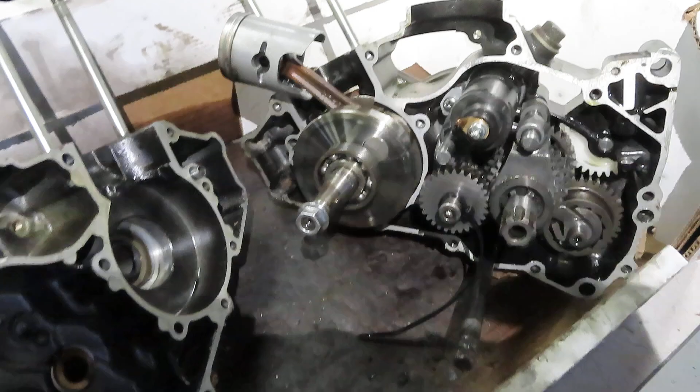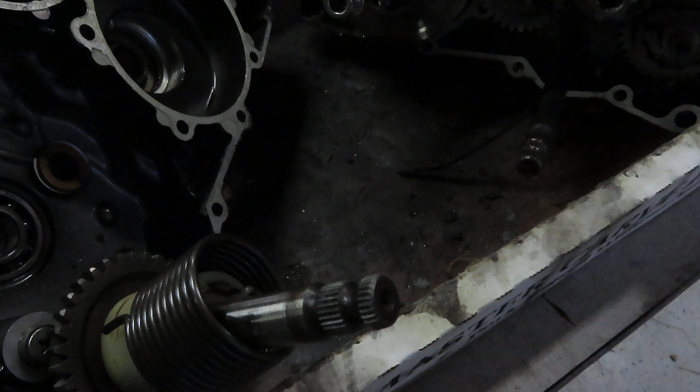I am working on my 1992 KE100, a kid's bike. The problem with this bike is it broke the shaft that holds the Kickstarter on it. That's this part right here. And in order to fix that, you have to split the case. You can't remove a side panel and get at those parts. The case has to be split.

So the reason I'm doing this video is to tell you that, plus just kind of show you all the parts involved here. Maybe it'll help you if you have to do this job.

So first thing I did, of course, was take the engine out of the bike. Pretty simple. I got it over here and I removed all the bolts from the case halves and was able to split the case. It's a little tricky. If you have a case puller like they show here in the manual, that would be nice. I don't have one, so I just kind of kept working it, and then I tapped on the crank nut here a little bit, and finally this thing came loose, and I got into it.

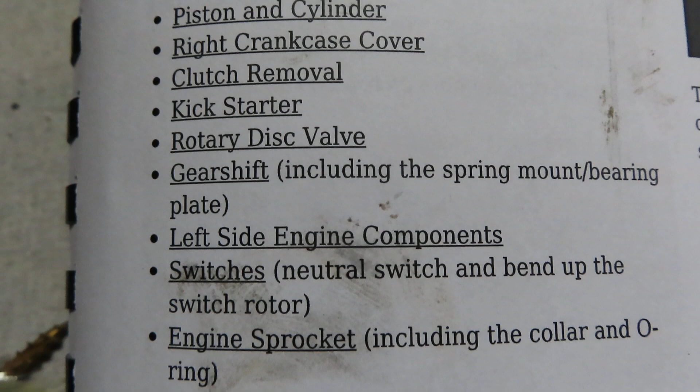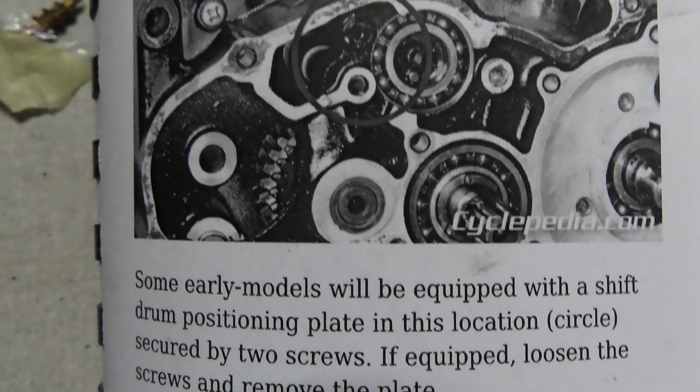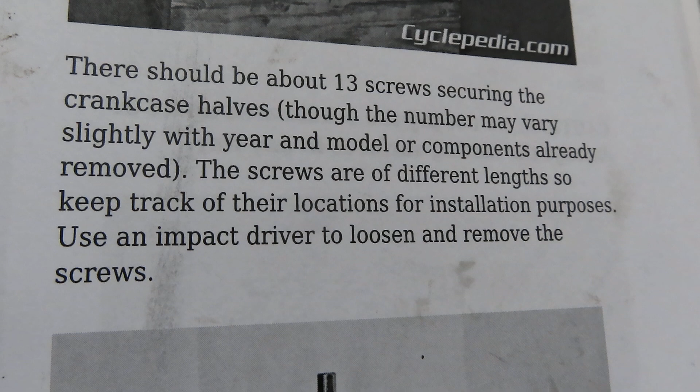For splitting the case, here's what the manual says. I'll just scroll down through it slow, and if you want to read this, you can pause it. That's a list of all the things that you want to remove to do it. Here's a note about earlier models equipped with a shift drum positioning plate. This one didn't have one. It says there should be 13 screws holding the cases together. Make sure you got them all before you start beating on stuff.

So I got it split apart, and I kind of set the halves in a manner that they could drain all the oil out real nice so it's clean. But the gear shift assembly has a gear, the Kickstarter has a gear right there. I'm shining the light on it. It's in the center of your screen. That's located in the left side of the crankcase. And then the shaft goes through the right side of the crankcase, and that spring and that plastic piece are installed on the other side. So yeah, there's no way to get that shaft out of there without splitting the case.

I replaced all the seals on the cases that I could find. I think I did about 6 of them. Here's the pile of old seals. Might as well do it while you got it split apart. So I'm going to put this thing back together here pretty quick. I'm going to show you some of the other parts that came off this thing, just for the fun of it.

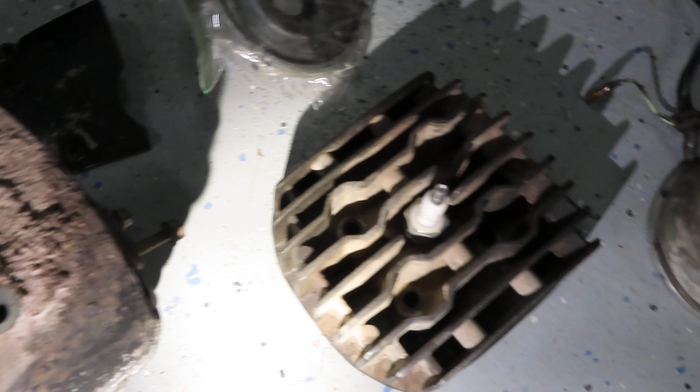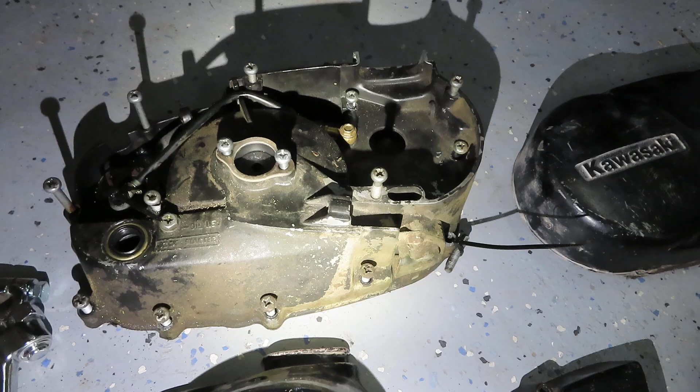Of course, cylinder head, cylinder, there's the carburetor cover, there's crankcase cover number 1, and that one had a couple seals in it. That's where the Kickstarter shaft comes out right there. And then here's the cover for the sprocket.

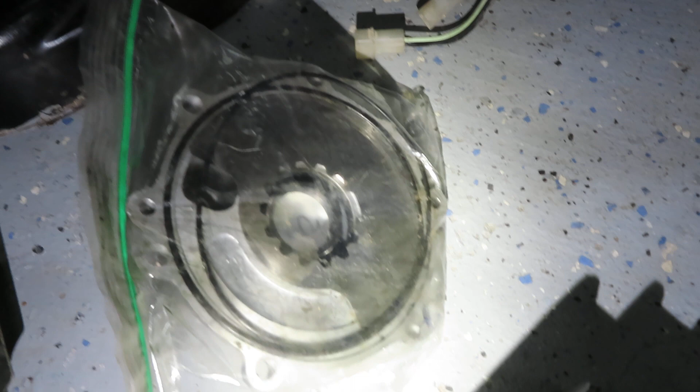This is a rotary valve engine, so there's the rotary valve assembly. You want to pay attention to which way that plate goes when you remove it from the bike. Make sure it's right side up. It's keyed, so it's hard to put it back on there wrong, but just make sure you know which side faces which side.

The piston in this thing looked okay. It's a little loose up in the wrist pin area, but the bike ran pretty good, so I'm not going to worry about it. Down inside the crank, it seemed to be pretty tight. So here's the magneto assembly.

And before I put this bike back together, I'm going to clean this stuff up really good and paint it. I love to put stuff back together and make it look like new. That's kind of my thing. So here's the pipe, a bunch of other parts that came out of it.

So as for getting parts for this bike, obviously it's old, so the kickstart shaft gear assembly here came off eBay. It's in good shape. I got all the seals and stuff off of eBay from someone who sells parts for bikes. So all in all, I won't have too much into this, maybe 150 bucks or something.

Anyhow, I hope this video helps you if you're going to tackle this project.